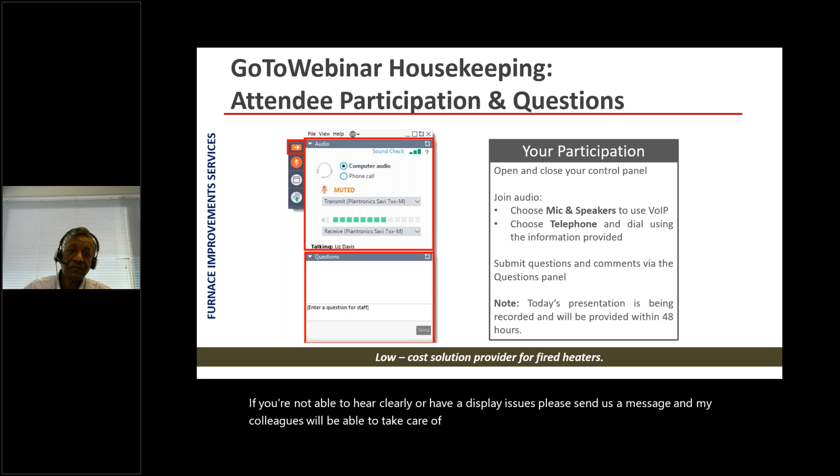I want to start with a brief introduction of our company, Furnace Improvements. We started in 1996. We will be completing 25 years in the business next year in March. We currently have 3 offices. The head office is in Sugar Land, Texas. We have an engineering office in Noida. We started it in 2005.

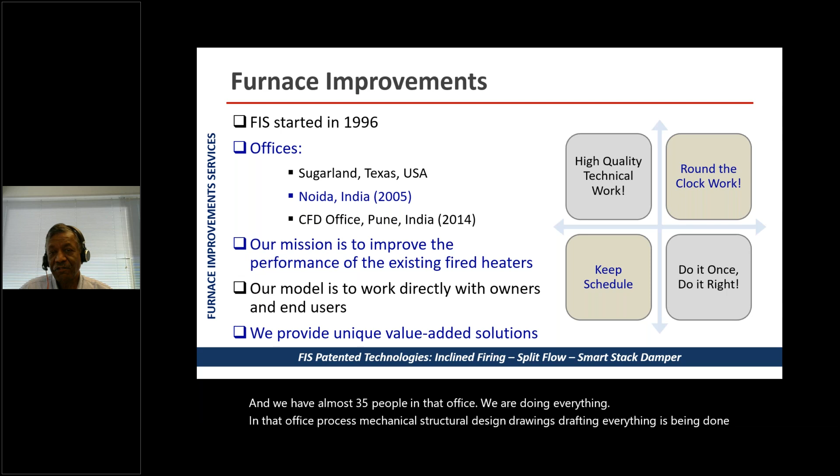And we have almost 35 people in that office. We are doing everything in that office: process, mechanical, structural, design, drawings, drafting, everything is being done there. We are a full service heater company and we can execute projects on a turnkey basis, including erection. Our CFD office is in Pune, India. It started in 2014. Our CFD team has been working exclusively on combustion, heat transfer, and fluid flow problems.

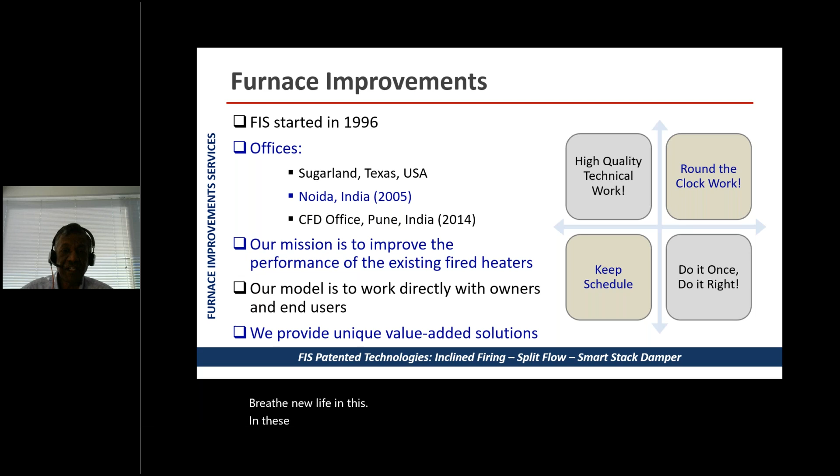Most of our business has been working on improving the performance of existing fired heaters. We try to breathe new life into these furnaces. Each coker heater is custom and unique. The problems being faced by the clients are also different in many cases. We study each heater and carry out root cause analysis in a very systematic way.

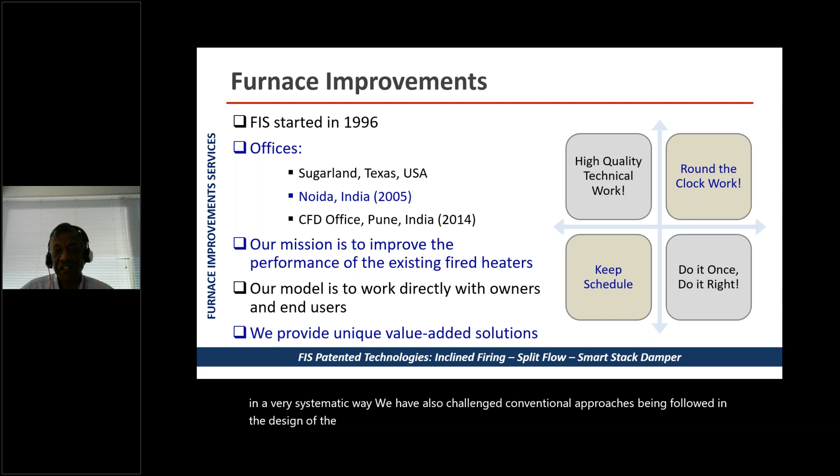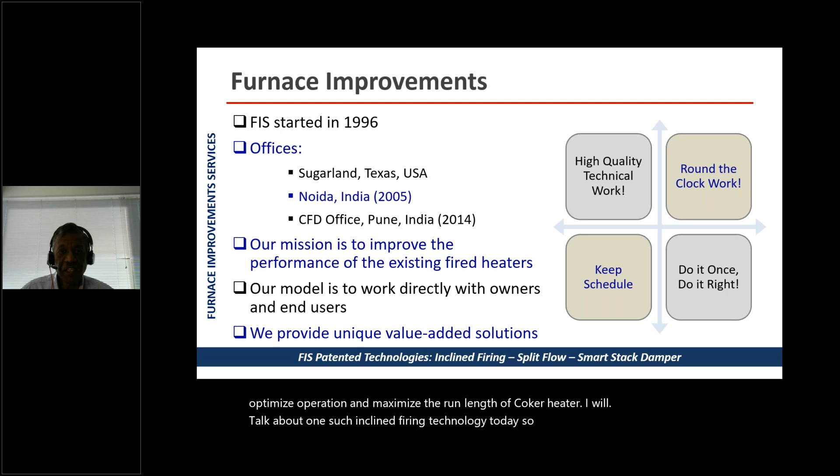We have also challenged conventional approaches being followed in the design of the heater. We have some new technologies that can help you optimize the operation and maximize the run length of coker heater. I will talk about one such inclined firing technology today. So that's basically a little bit of introduction about our company.

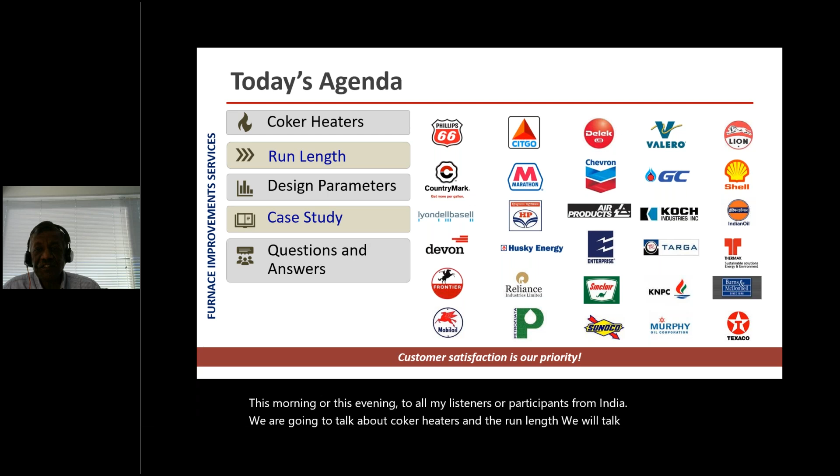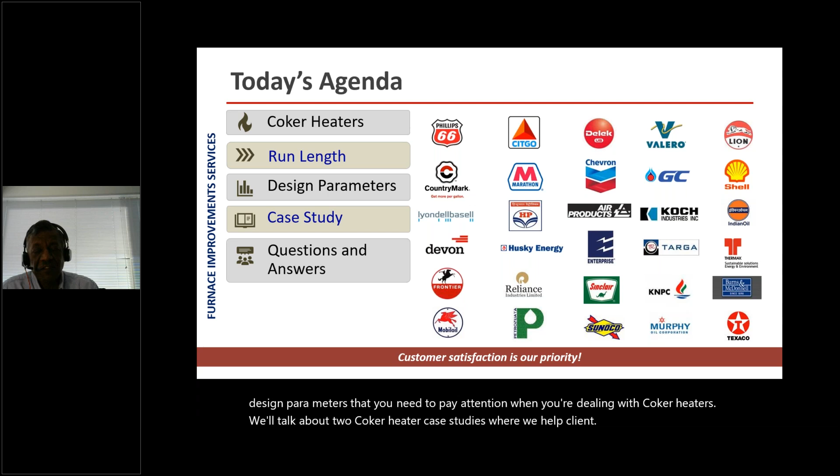This morning or this evening, to all my listeners or participants from India, we are going to talk about coker heaters and the run length. We will talk about different configurations of coker heaters, advantages, and disadvantages. Then we'll move to the critical design parameters that you need to pay attention to when you're dealing with coker heaters. We'll talk about 2 coker heater case studies where we helped clients improve the run length of their heaters. And then we will have the question and answers in the end for about 10 minutes.

So let's talk about coker heaters. And today we will be talking about the heaters which are there in the refinery. Typically, a refinery has a number of units and they convert crude to gasoline, diesel, and other useful products. The number of heaters in any refinery could be anywhere between 15 to 60. But the 4 important heaters I have listed over here are the atmospheric heater, where we heat the crude to about 700 degrees. Then comes a vacuum heater, where we heat the feed to 800 degrees and subject it to vacuum distillation.

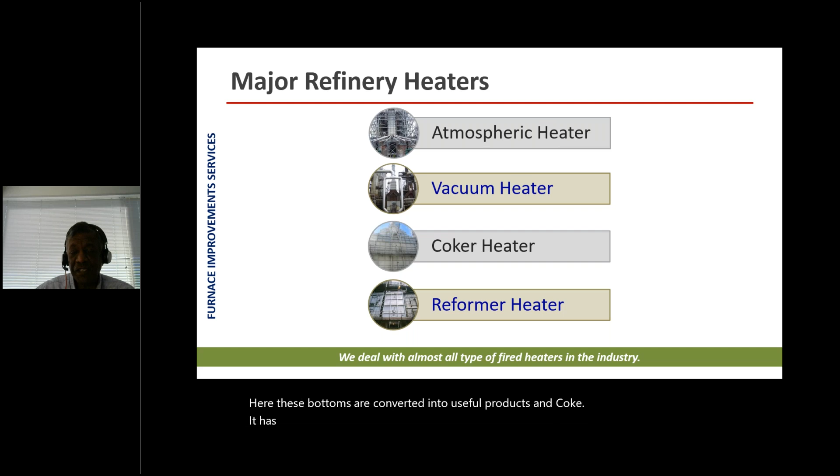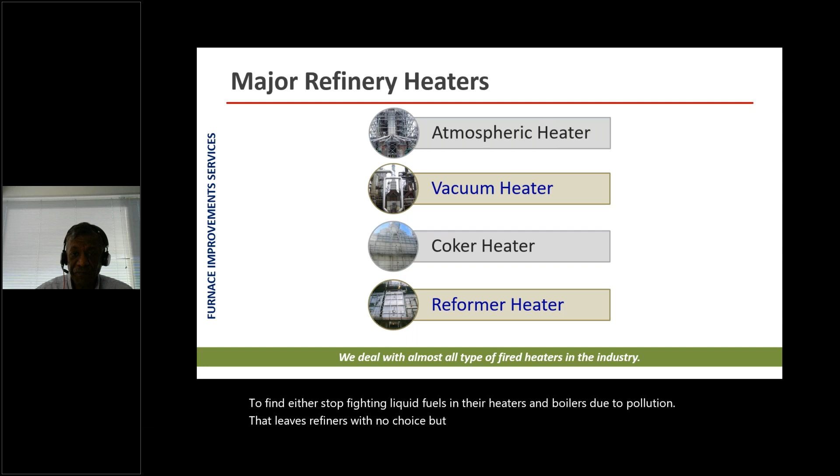And the residue from atmospheric, vacuum, and all other units is collected and sent to the coker heater. In the coker heater, the feed is heated to almost 930 degrees F or 500 degrees centigrade. Here, these bottoms are converted into useful products and coke. It has acquired extra importance in refineries all over the world as refineries have stopped firing liquid fuels in their heaters and boilers due to pollution. That leaves refiners with no choice but to install a coker unit. The coke produced is burnt in power plants and used in many other industries. So these four heaters are very critical heaters.

The last heater we want to talk about is the reformer heater, the catalytic reformer unit. And here we heat the feed to almost 1000 degrees F. But the difference is it's a very light feed. It is naphtha and recycled gas. And the heating is done in the gas phase. So it's a very different heater. But our focus today will be on the coker heater.

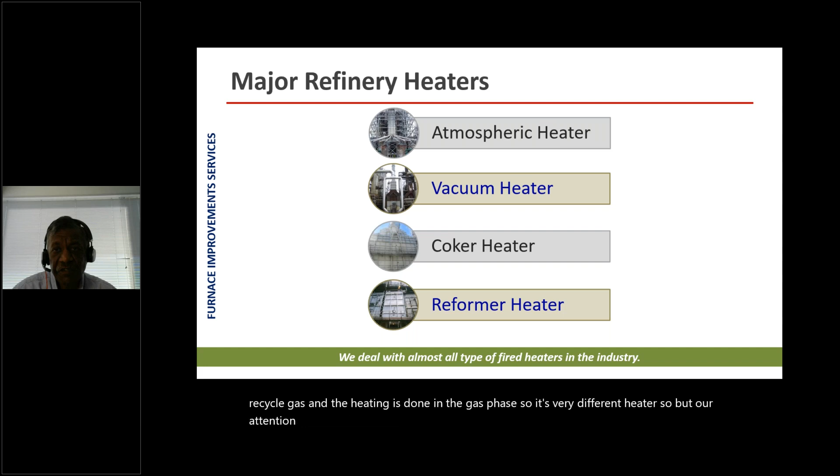So in the coking unit, our objective is to process this heavy material, vacuum residue and all other residues, into higher value products such as gasoline, diesel, LPG, and petroleum coke. So what we are going to do is to heat the charge rapidly in the furnace. And this is a very critical furnace because there is a reaction taking place. If you look at all the refinery heaters, there is a simple heating or heating with phase change taking place. Here, it's not only heating and phase change, there is a reaction taking place, and about 6% of the feed is cracking per pass. And it is an endothermic reaction, and the heater is supplying the heat.

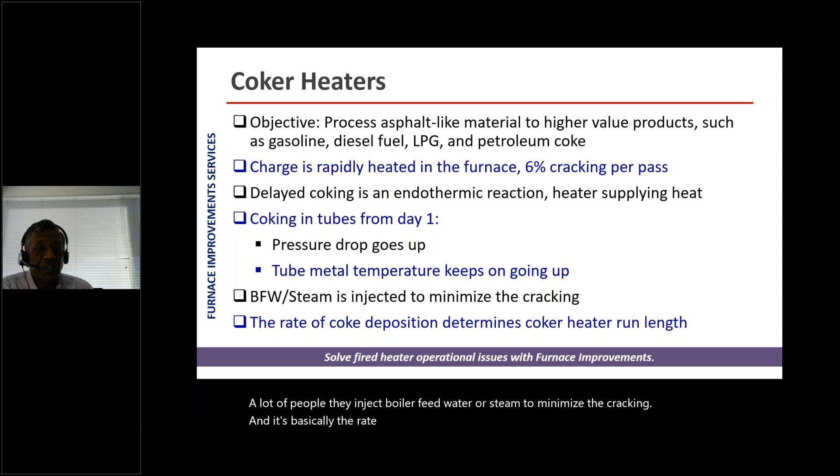So in this heater, we expect coking to start from day one because the feed is such and we are cracking, so the coke starts depositing. And two things happen. Pressure drop goes up and the tube metal temperature also starts going up because coke is an insulator of heat. A lot of people inject boiler feed water or steam to minimize the cracking. And it's basically the rate of coke deposition which determines the coker heater run length. So run length is a very, very important parameter, and we'll come to that in a few minutes.

So coker heaters, there are two types of coker heaters currently in the refinery. The single-fired coker heater has been the classic heater, and the double-fired heater is the modern heater. In a single-fired heater, as you can see from this sketch over here, there are two cells, and in each cell we have a central bridge wall, with tubes on the wall and burners in the center firing along or at the bridge wall.

The function of the bridge wall is to divide the radiant cell into independently controlled cells so that you can monitor and control the outlet temperature of each pass. So that is the construction of the classic heater, or the single-fired heater. We do put the last 5 tubes, if you see over here, at 3D pitch. The last 5 tubes have typically been put at 3D pitch, and that is done to minimize the radiant heat flux in the hottest section.

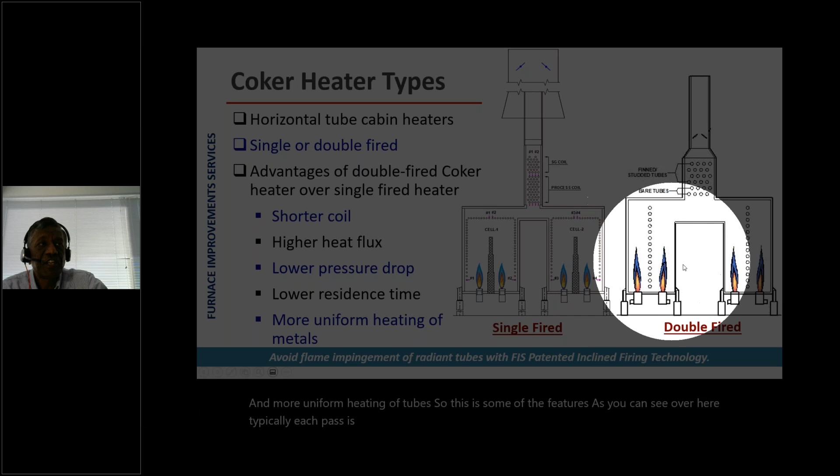As a result, I have two choices. I can keep the same velocity and have lower pressure drop, or I can increase the velocity, the fluid mass velocity, and maintain the same pressure drop. It does offer lower residence time, lower coking, and more uniform heating of tubes. So these are some of the features. As you can see over here, typically each pass is almost like a cell. So one pass is like a cell. And here also the last 5 tubes are put at 3D pitch, and the convection section is on the top in the center.

There is one extra feature which has been incorporated in double-fired heaters, and that is because each pass has its own radiant cell or radiant section, the designers are able to offer online spalling. In online spalling, what you do is you cut off your feed and inject steam. And when you inject steam, it breaks the carbon coke from the tubes and removes the coke. And we can do that. Once we do that, it will lower the tube metal temperature.

So let's say it is a 2-pass heater or 4-pass heater. We go on a reduced load, inject steam in one pass, clean it up partially, and then go to the second pass. And if there is a third pass or fourth pass, we do that. So that is one advantage in double-fired heaters, and refiners make use of this facility to spall their heaters, reducing the tube metal temperature by about 100 degrees each time. But after 2 or 3 spalls, they again have to clean their fired heaters or coker heaters using pigging.

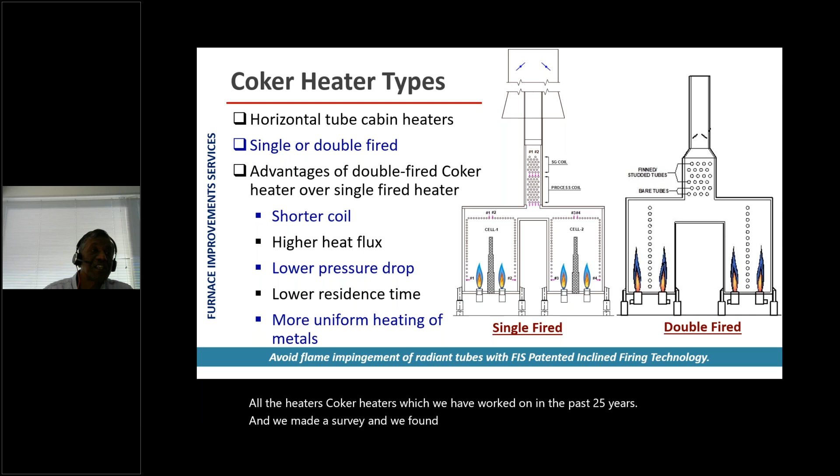So the question comes over here: if this heater is so good, what went wrong? Because in the last 5 years, there were 3 or 4 clients who have modern double-fired coker heaters, and they were experiencing only 3 to 4 months run length. So we started studying all the coker heaters which we have worked on in the past 25 years. And we made a survey and we found several deficiencies in the double-fired coker heater design.

And these things happen when everybody starts building coker heaters. All heater companies can offer coker heaters now. And when all companies can offer coker heaters, it becomes competitive. And once it becomes competitive, vendors start cutting corners and start trying to make heaters more and more compact. And once they do that, you have short run lengths. So if you cut corners, you will get nothing but short run lengths. But that's what we want to talk about today: how can we improve the run length. But the reason I'm saying this is that it has been a problem.

We thought double fired heaters would be able to offer 1 year run length or even more, but I think the heaters which we are seeing in the industry are not able to do that. There are a couple of things. In coker heaters, tubes generally last for about 8 to 10 years. So every 10 years, you can upgrade your coker heater while retubing the radiant section or retubing the convection section. So you do get a chance to make it right, or at least partially right.

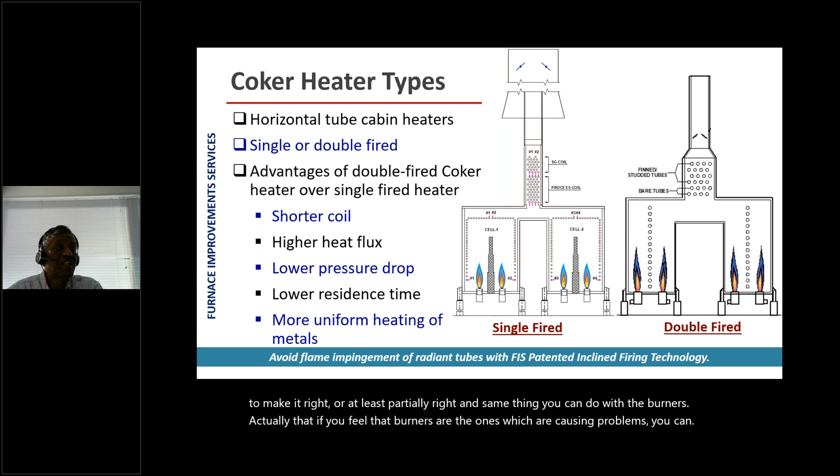And the same thing you can do with the burners actually. If you feel that burners are the ones which are causing problems, you can upgrade them or change them. It is not very expensive. So let us see how coker heaters are designed.

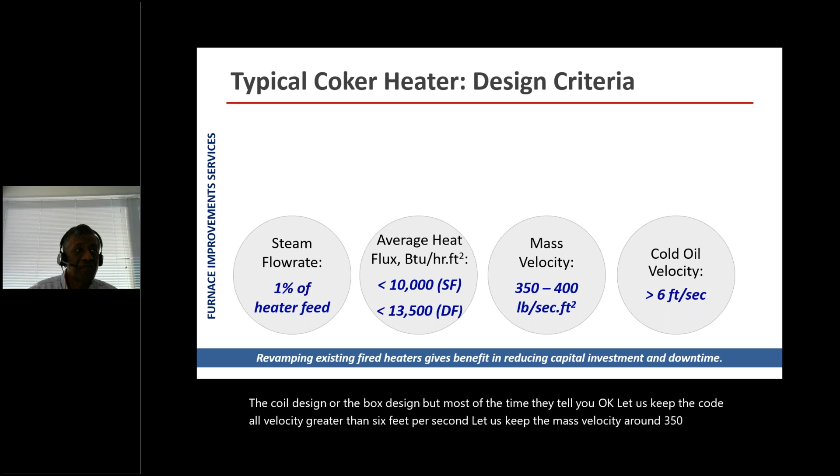Generally, the designers or the licensors will give you a few guidelines. And sometimes they give you the coil design or the box design, but most of the time they tell you, okay, let us keep the cold oil velocity greater than 6 feet per second. Let us keep the mass velocity around 350 to 400. Keep the flux less than 10,000 for single fired or 13,500 for double fired. And inject boiler feed water or steam, which could be around 1% of the heater feed. So these are some of the rough guidelines given by the licensors, or the people who are building coker units. That's typically what we get.

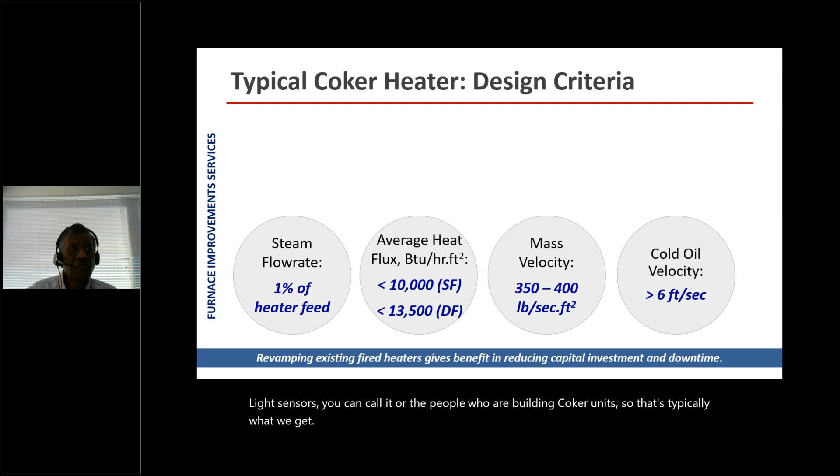So we did a database of almost 38 coker heaters we had worked on or studied at different times. And most of the coker heaters are multiple radiant cell horizontal tube box heaters. The flow is from top to bottom. Average inlet temperature is around 600 degrees, outlet is around 930. Inlet pressure about 361, outlet around 70 psig. So about 290 is the average pressure drop across this heater. Average mass velocity is around 400 pounds per second per square foot.

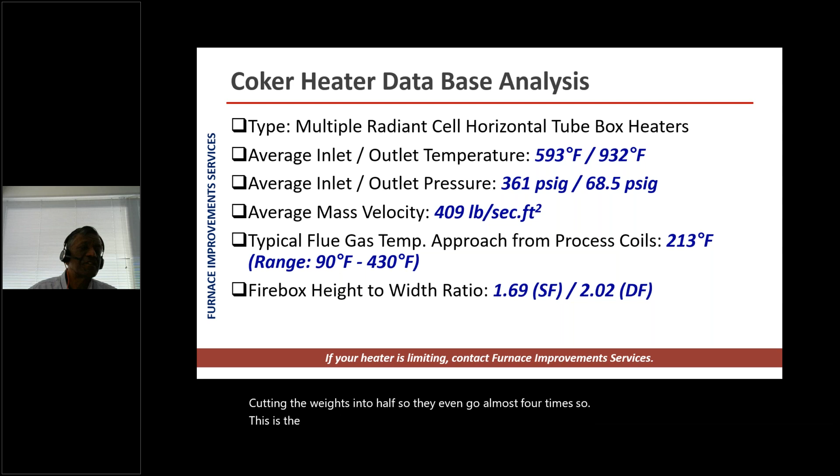Typical flue gas temperature approach from the process coil is around 200 degrees. I will tell you a little later the importance of this approach, but to me, it appears very high. And another thing which we noticed was the firebox height to width ratio. Surprisingly, single fired had a lower height to width ratio of 1.5 or 1.75, and the double fired were offering 2.02. And some of these heaters even have a height to width ratio of 4, because if you put 2 rows of tubes in one firebox, you're basically cutting the width in half. So they go almost 4 times. So this is the typical analysis of coker heaters we want to talk about.

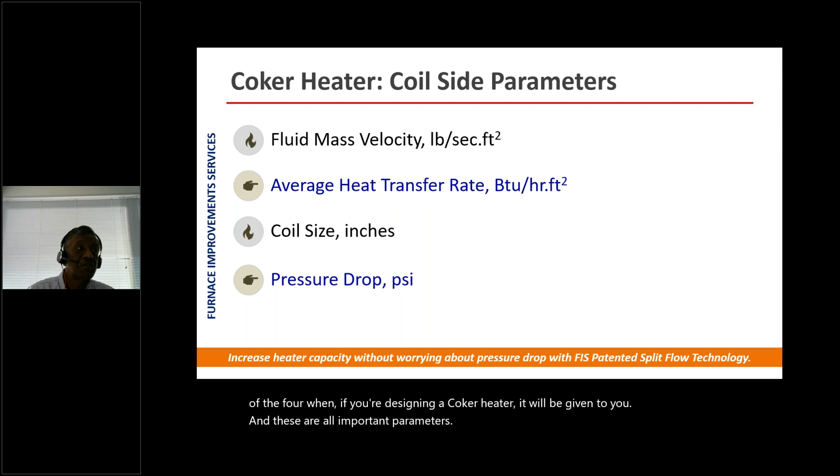What are the different parameters when we design these things? As I said, fluid mass velocity figures into the coil side parameters, along with average heat transfer rate, coil size, and pressure drop. These are some of the four that, if you're designing a coker heater, will be given to you. And these are all important parameters. Let us start looking at these.

Fluid mass velocity is a very important parameter. It is mass flow divided by the flow area of the coils. The units are pounds per second per square foot. As we said, the average is 409. Now, one thing you have to realize is pressure drop is proportional to the square of mass velocity. So if you increase the mass velocity, the pressure drop will go up.

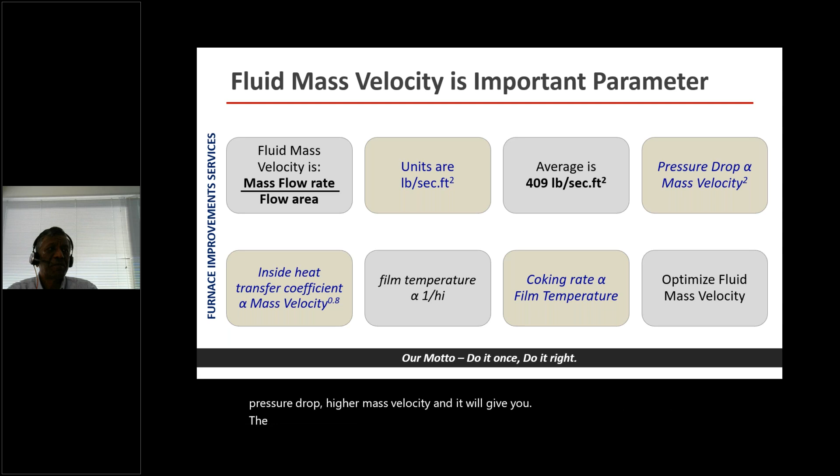Another thing you also have to see is the inside heat transfer coefficient. The inside heat transfer coefficient is important because it controls the film temperature, and film temperature controls the coking. The inside heat transfer coefficient is proportional to the mass velocity raised to the power 0.8. So you can go for a higher pressure drop, higher mass velocity, and it will give you a lower film temperature and higher run length, optimizing your run length.

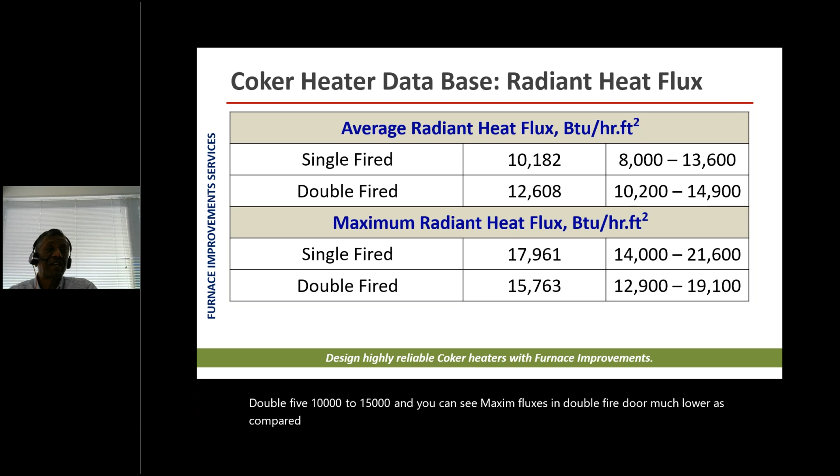So the third thing, before I go to the coking rates, I want to talk about the tube size. Typically in coker heaters, the smaller the tube size, the better off you will be, although you don't want to go lower than 3-inch, because if you have to clean it or remove coke, you will have trouble. So 3 inches is typically the lowest size, but 3.5 or 4 inches are typically the sizes used in coker heater designs, and they offer the best surface to volume ratio.

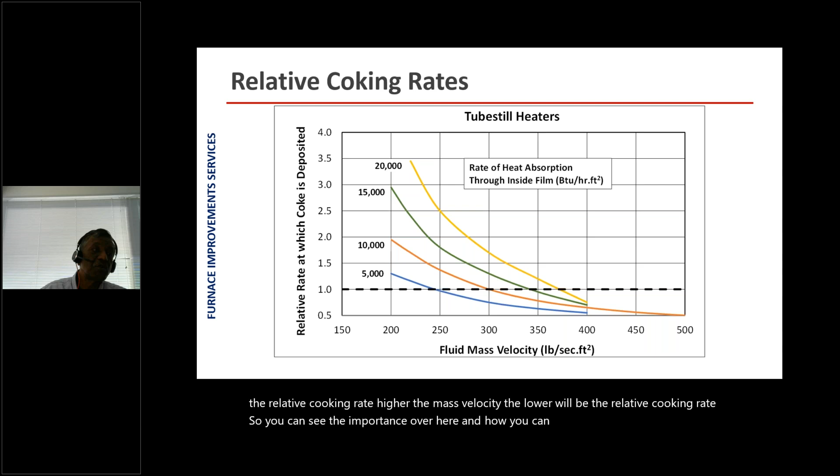Lower the flux, the lower will be the relative coking rate. Higher the mass velocity, the lower will be the relative coking rate. So you can see the importance over here, and how you can optimize your coker heater design or coker heater operation by trying to see if you can optimize or maximize the fluid mass velocity.

So let's talk about the fireside parameters. Fireside parameters are heat release per burner, burner to tube distance, burner to burner distance, and burner air side pressure drop. These are very important parameters. They determine how long your flame is going to be, how high your flame is going to be, how is the heat distribution in the furnace, and how uniform it will be.

The reason I'm talking about these parameters is that they do not affect the design of the coker heater. When you're designing the coker heater, or any heater, these parameters do not play any part in the design, and it is left to the designer's experience to take care of these. And this is where most of the coker heaters fail, actually. And I will show you how people work and do it.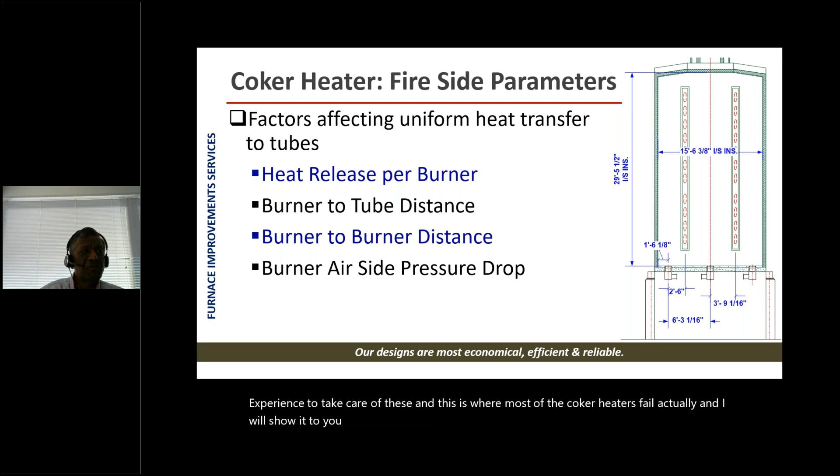I think all of you know, fired heaters are designed using correlations developed by Lobo and Evans back in the 1940s. And they assumed that there is going to be uniform heat transfer in the firebox, or a continuously stirred tank reactor model. That is a basic assumption. Now, we have been using these formulas for more than 80 years now, but we also know that these are not true,

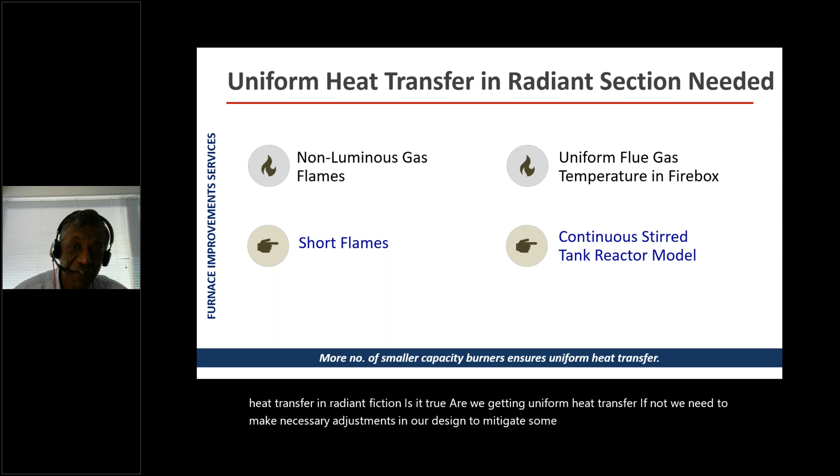because today we have the power of CFD modeling, and we can check the radiant section, the burners, the flue gas temperature profiles, the flame length, the heat transfer to the tubes and the location of hotspots. So what I feel is it is important to do CFD modeling and make sure that, when we designed the heater, we assumed uniform heat transfer in the radiant section. Is it true? Are we getting uniform heat transfer? If not, we need to make necessary adjustments in our design to mitigate some of these factors, and you can do that because we have CFD available, and we can ensure that by CFD, we take care of most of these parameters.

We also did a survey on the burners. A typical coker heater had about 64 burners. The range was from 3 to 144. Design heat release per burner was about 3 million BTU average. Burner to tube spacing was about 4 feet or even less, 3.7 on average. The lowest was 2.5 and the highest 6.8. And then comes the burner to burner spacing for uniform heat transfer. We found it was 5 feet, an average of 4.7 feet.

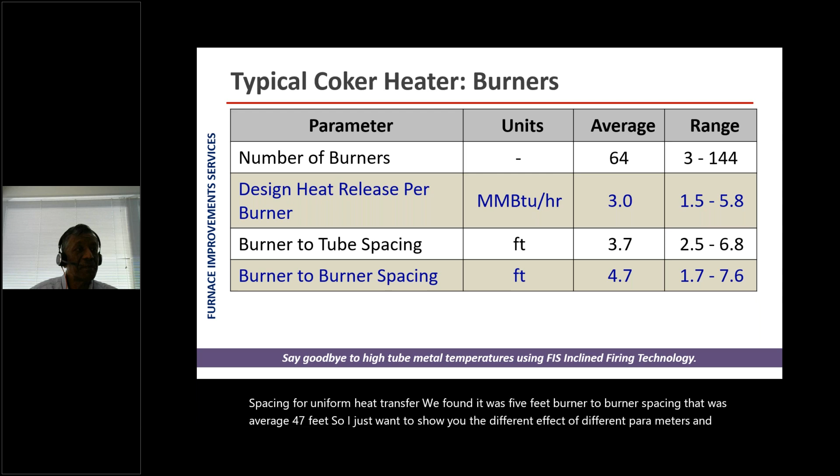So I just want to show you the effect of different parameters and how they play a part in your fired heater run length. This is a plan view of a double fired coker heater. If you look at the overall picture, everything looks all right. The burners are there. There are 3 rows of burners. The center burners are, I think, almost every 4 feet. There are 2 rows of burners on either side, and there are 2 rows of tubes.

But this coker heater is having a lot of issues. This heater is having a run length of only about 3 to 4 months. So some of these parameters may be more important. One of the parameters which I find important is the burner to tube clearance. The reason I say this is that ultra low NOx burners have very long flame lengths. And when they have long flame lengths, the flames can lean actually. Flame is nothing but a gas jet, and it can always lean. These burner flames get affected even by wind velocities.

So some of these things could make a great impact. And flames are very, very high temperature gas jets. Typical flame temperature could be anywhere between 2500 to 3000 degrees. So you can see how the burner layout or the heater layout can affect the run length and other parameters.

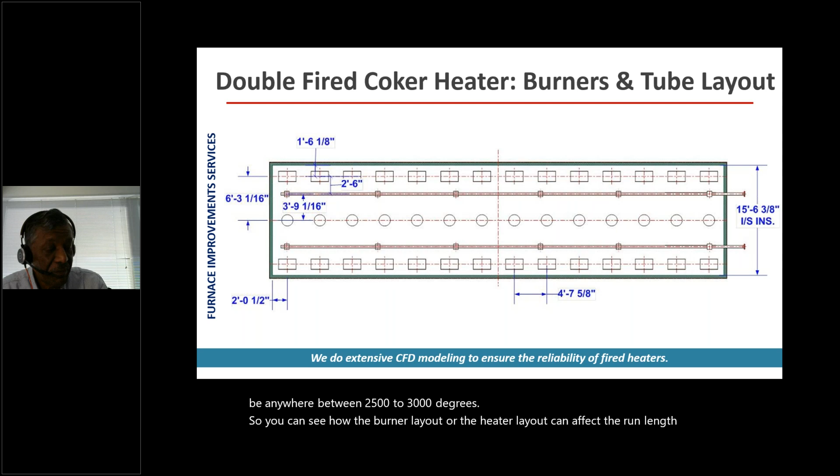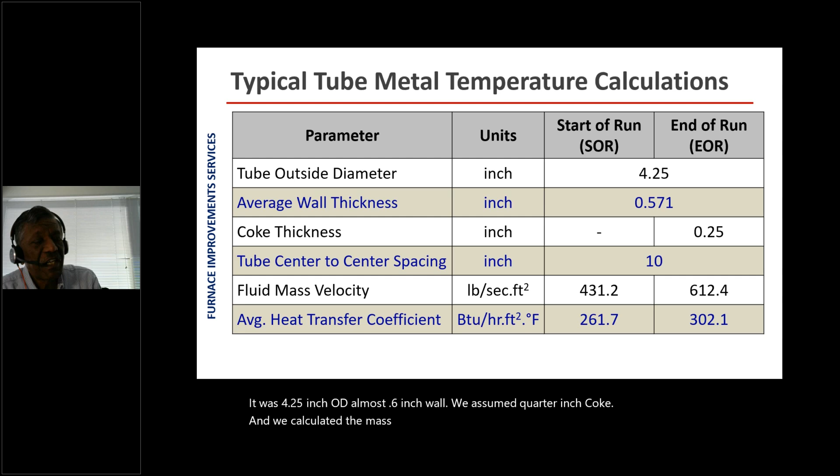I want to tell you a little bit about the tube metal temperature calculations. We do tube metal temperature calculations at the start of run and at the end of run. This is for one heater, which is a single fired heater. And it was 4.25 inch OD, almost 0.6 inch wall. We assumed quarter-inch coke. And we calculated the mass velocity, we calculated the heat transfer coefficient, and then we calculated the maximum flux and the maximum tube metal temperature, assuming a fluid temperature of 950. It starts with about 1082 at the start of run with no fouling and almost 1255. Maybe that is the limit of even the coil metallurgy actually.

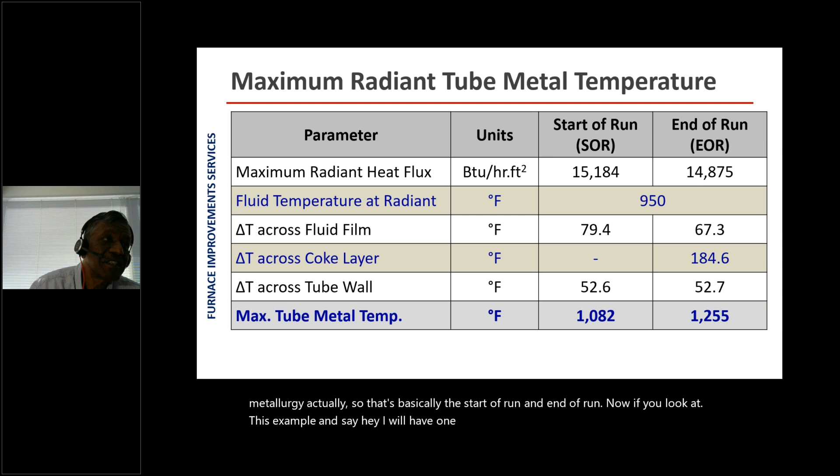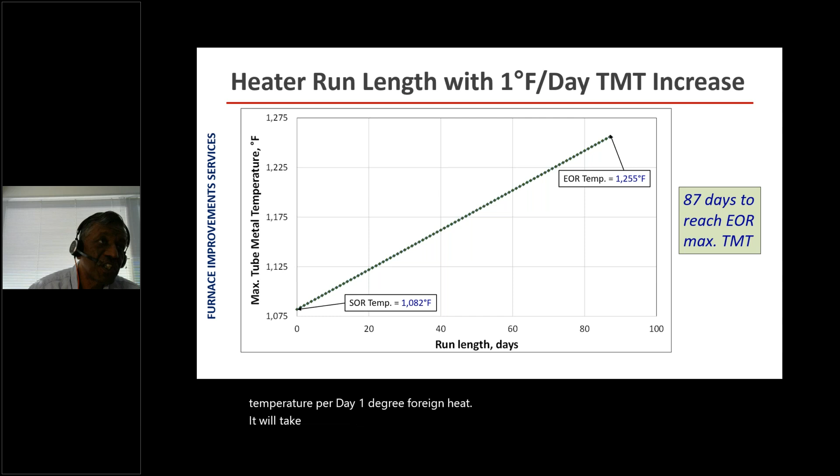So that's basically the start of run and end of run. Now, if you look at this example and say, hey, I will have 1 degree temperature increase per day, how will that affect? So we plotted this, and if you use 1 degree Fahrenheit temperature rise in tube metal temperature per day, it will take you 87 days to reach EOR or maximum TMT of 1255. So you can see it is not good enough. You don't want 3 months run length of your heater. We are looking at

lower temperature rise. If you want 1 year run length, then typically say about half a degree is what you would like to get control. That's how you should control your run length, about half a degree. And that is valid for P9 material where the limiting design temperature is 1300. Please make sure your tubes are designed for 1300 because it requires higher thickness. The other option, and a lot of refiners have opted for this change, is to upgrade the metallurgy to stainless steel 347. And that gives us about 1500 degrees temperature limit. And there, if you see, we can afford to have a 1 degree temperature rise per day.

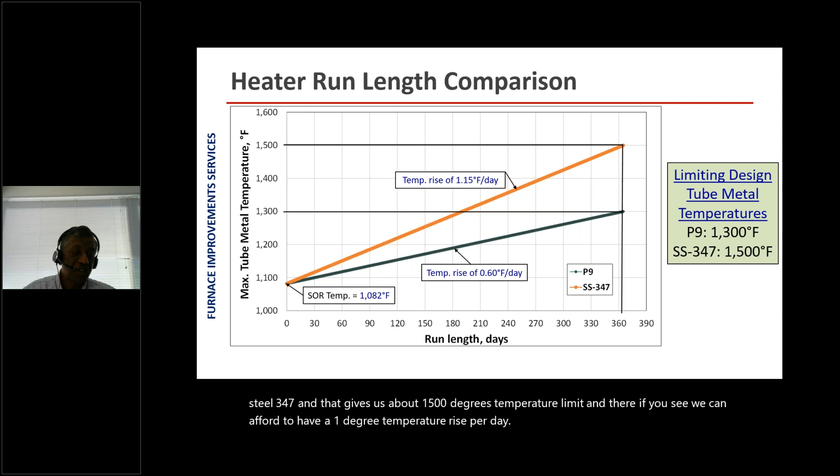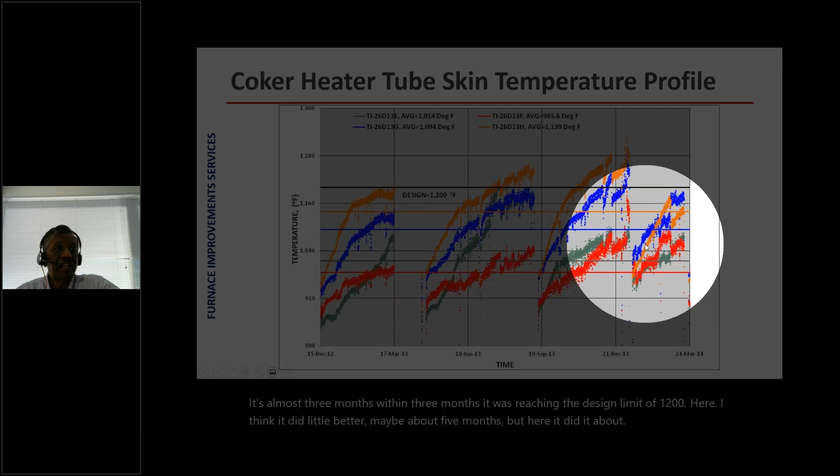So I want to show you the coker heater tube skin temperature profile. This is from that same heater where I showed you the burners and tube layout, the plan view. And if you see over here, it's almost 3 months. Within 3 months, it was reaching the design limit of 1200. Here, I think it did a little better, maybe about 5 months, but here it did about 3 months again, and here it did even less than 3 months. So if you see the temperature rise, they had to clean almost every 3 or 4 months, which is not acceptable. That requires a lot of effort.

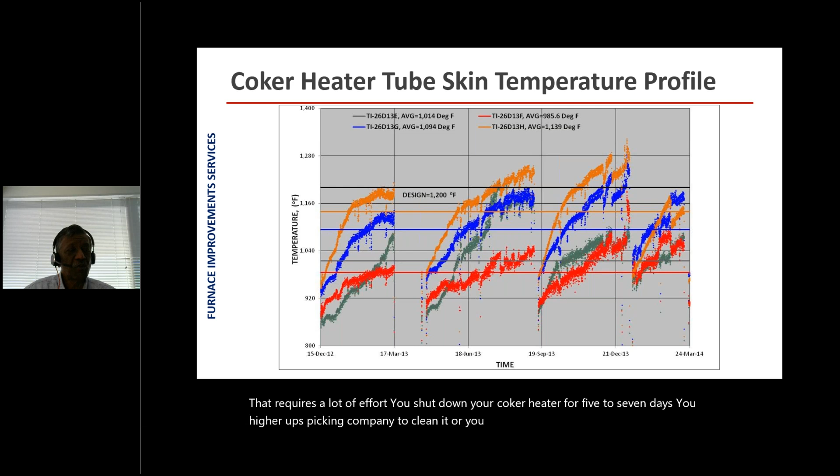You shut down your coker heater for 5 to 7 days. You hire a pigging company to clean it, or you do steam air decoking. So a lot of problems. So the best thing is to minimize coking. So I want to present to you two studies, and this is a double fired coker heater, and the client was experiencing high tube metal temperatures in the lower tubes.

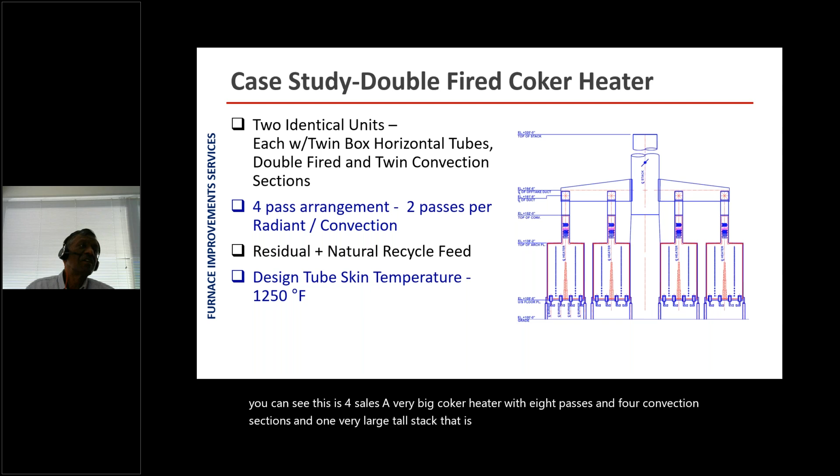So this is, as you can see, 4 cells, a very big coker heater with 8 passes and 4 convection sections and one very large tall stack. That is the configuration. So if you look at the configuration in detail, it was 4 burners. If you see over here, 4 rows of burners, 2 rows of tubes, a central bridge wall in the center. So that was the construction. This heater had 4-inch tubes in the top, 30 tubes, and bottom tubes were 5-inch NPS schedule 160. And this was having a lot of problems actually.

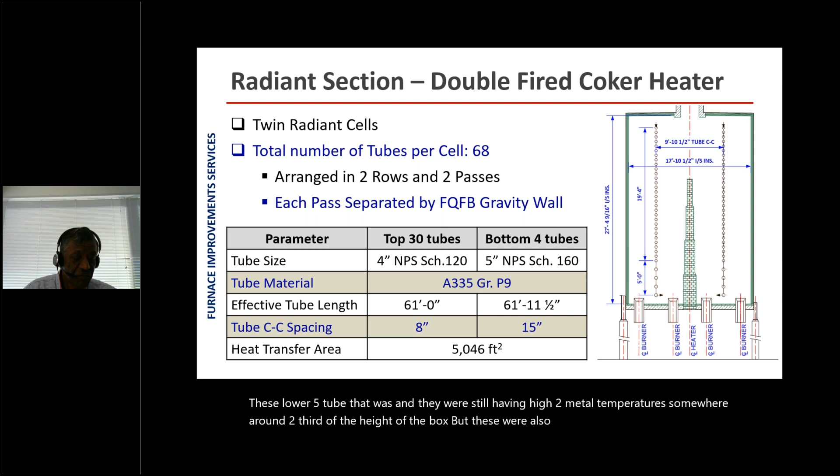And then the client told us they were having maximum coking in these lower 4 tubes. And they were still having high tube metal temperatures somewhere around 2/3 of the height of the box. But these were also coking up very fast actually. So we studied it, and we came up with several different revamp options. We said, okay, let us take your four radiant tubes which are at the outlet and change them with 6 4-inch NPS schedule 120 tubes. Now, client wanted to upgrade the radiant and convection coil metallurgy to 347H.

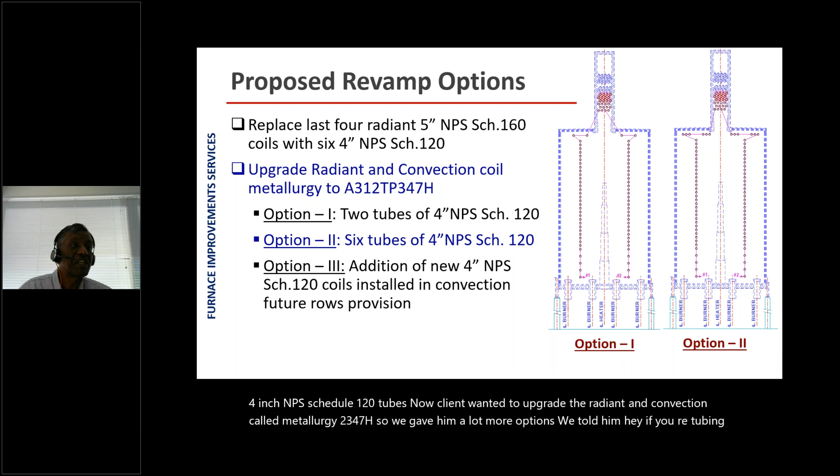So we gave him a lot more options. We told him, hey, if you are retubing it, we would like to see some modifications. And we gave them a modification in option 1 of putting 2 extra tubes on the arch, per pass.

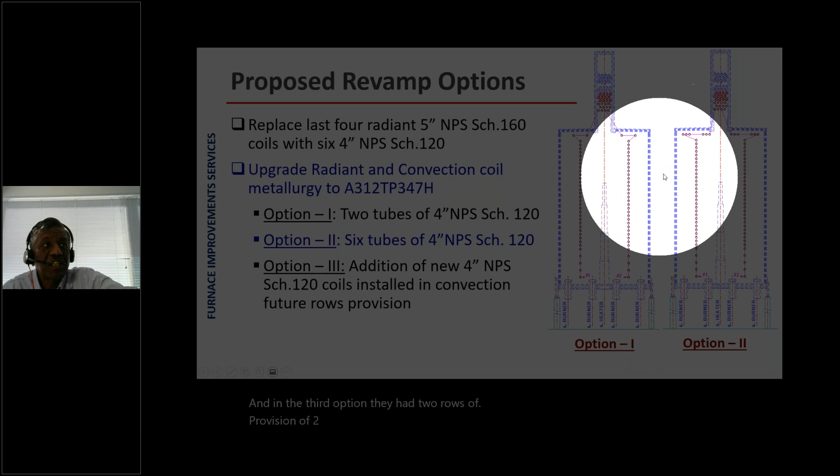In the second option, we gave him 6 tubes at the arch. And in the third option, they had 2 rows of provision of 2 future rows in the convection section. And we said, hey, let's do this as well as add 2 more rows in the convection section. So basically, we gave him 3 upgrade options.

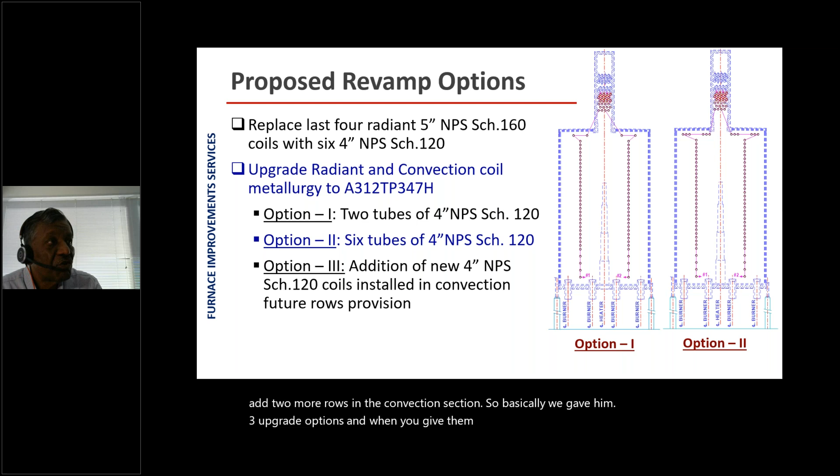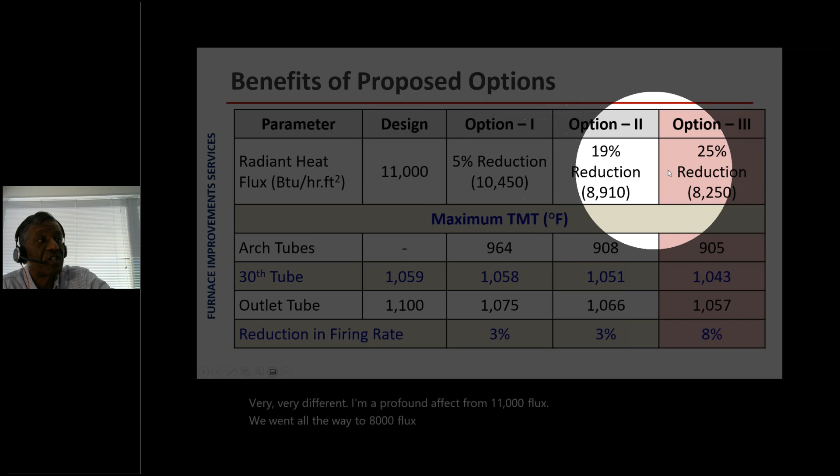And when you give them these options, you see the effect is very, very different, a profound effect. From 11,000 flux, we went all the way to 8,000 flux, 25% reduction in flux. We reduced the tube metal temperature from 1100 to 1057. And we also reduced the firing from whatever they were firing by about 8%, which is very, very profound.

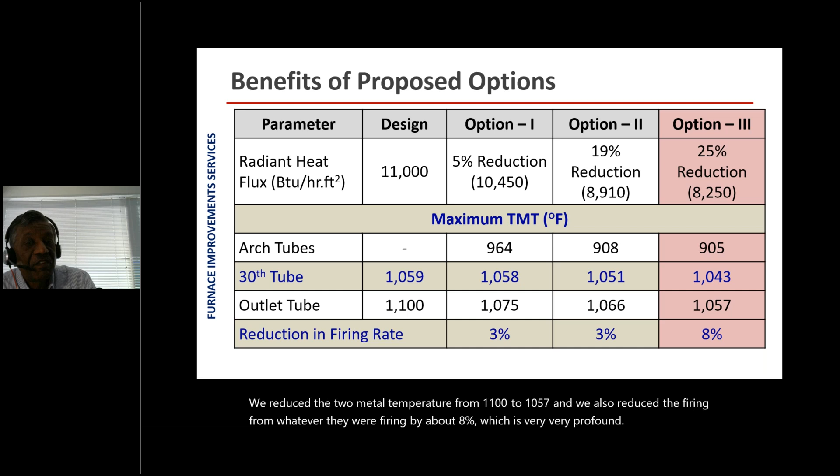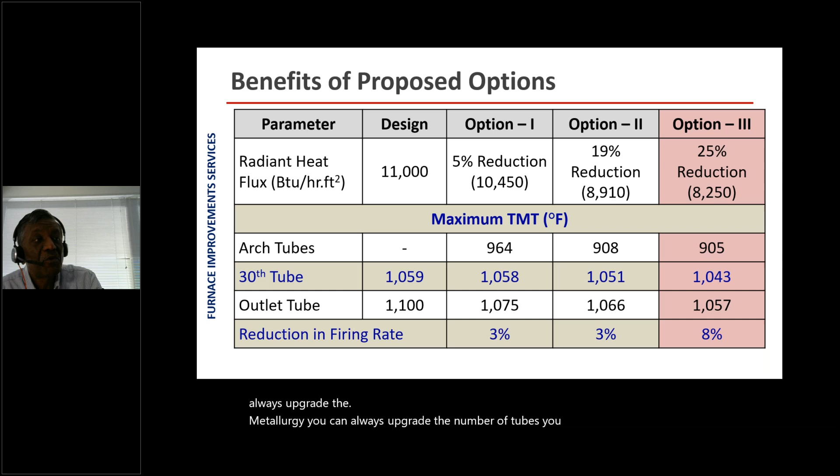So keep an open mind whenever you are retubing your coker heaters and look at different options. It is not necessary that whatever the heater vendor gave you 20 years ago is the optimum configuration. You can always upgrade, just like a computer. You can always upgrade the memory, you can always upgrade the hard drive. Similarly, you can always upgrade the metallurgy, you can always upgrade the number of tubes, you can always add more tubes. And those incremental costs are very, very low, especially when you're spending millions of dollars in retubing.

We had a similar recommendation on their existing burner layout. They had 14 burners per row, total of 56 burners in each cell. And these were ultra low NOx fuel gas fired burners. And we said, okay, let us do the CFD modeling and see what we find out.

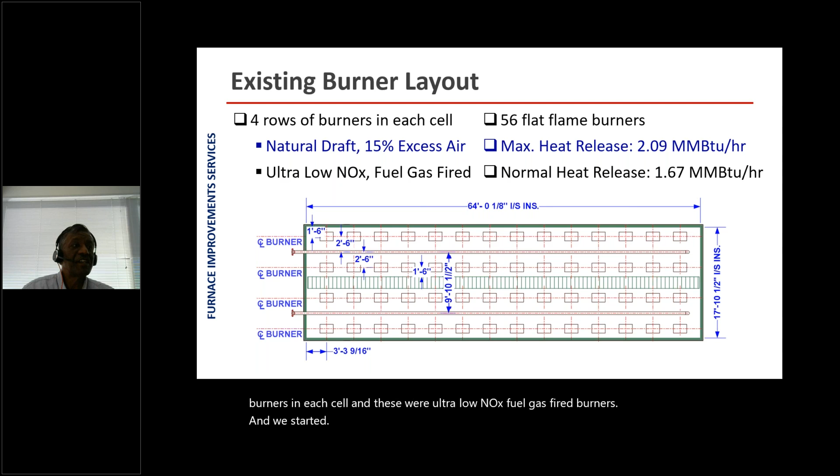We did the CFD modeling of these burners, and we found out that the flames were almost touching the tubes. I mean, if you look at D1, D2, D3, they are less than a foot. In fact, 6 inches. And this is at ideal conditions. And if you have wind blowing, if you have anything else going on, higher excess O2 or lower excess O2, the flames could touch. And that's where they were having hotspots.

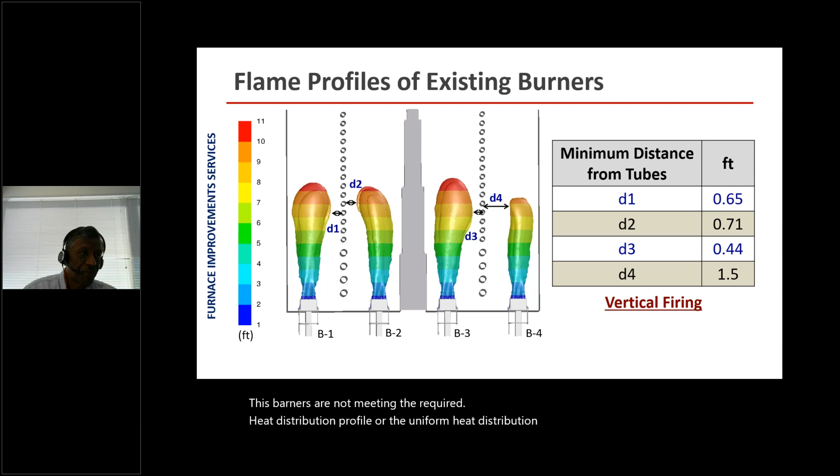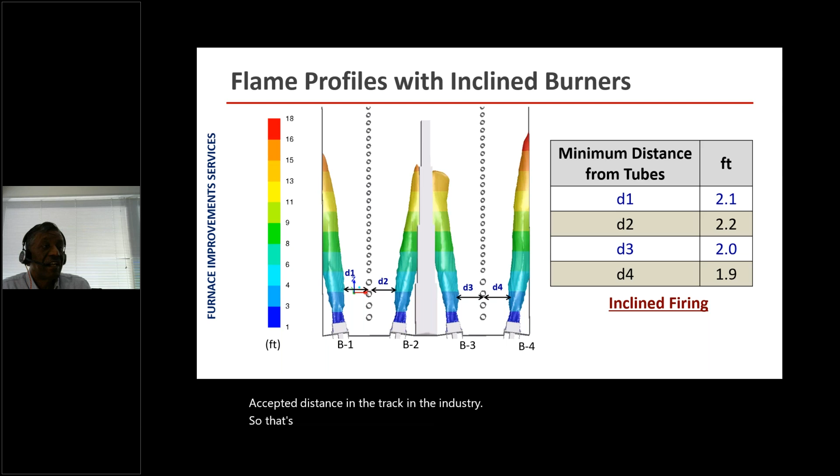So we came up with the conclusion that these burners are not meeting the required uniform heat distribution profile. So without asking them to spend too much money, we said, okay, let's take your existing burners and put them at about a 7-degree angle. So we took the existing burners and then moved them outwards by about 7 degrees. And when we do that, we are able to increase the minimum distance from the flame to the tubes to more than 2 feet. And typically 2 feet is the minimum accepted distance in the industry. So that's basically what we did, and it makes a lot of difference.

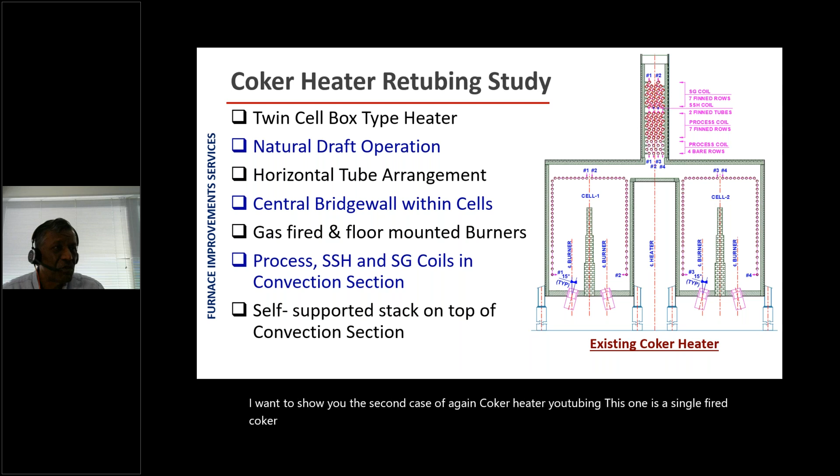I want to show you the second case of, again, coker heater retubing. This one is a single fired coker heater and a conventional coker heater with twin cells. There were 2 such heaters, so basically 4 cells again, and each cell was having 2 passes, common convection section, very central bridge wall with burners inclined at 15 degrees. Again, this company was facing a lot of problems. They were decoking every 6-7 months. The tube life was very low, almost about 5 years.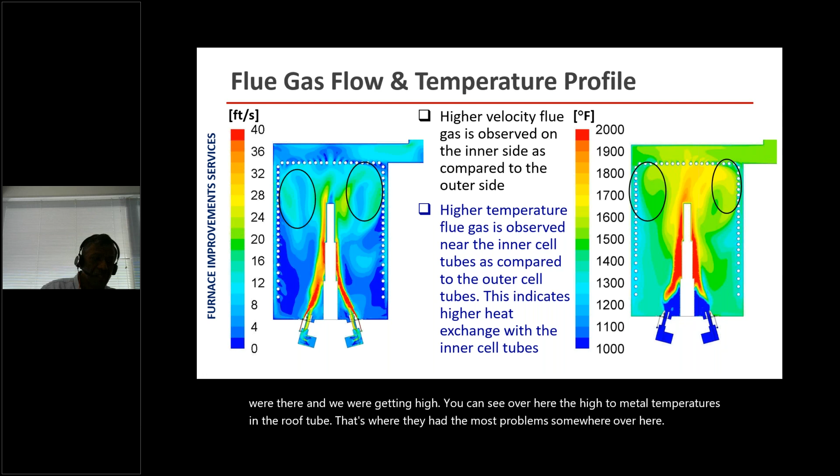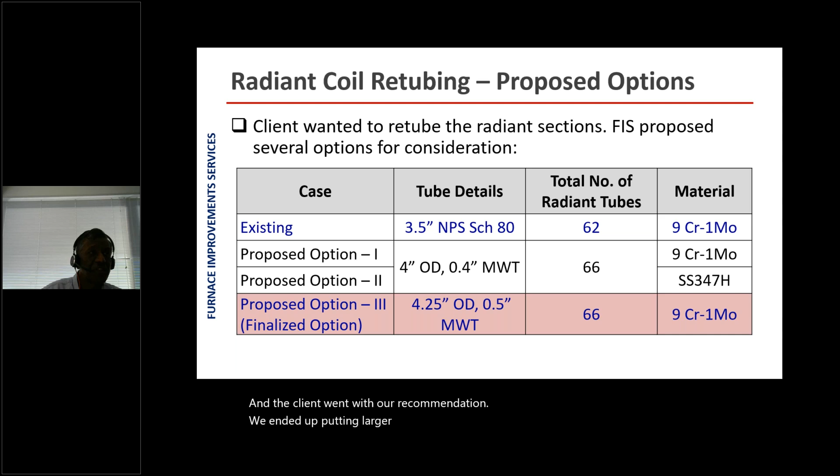So the client said, hey, I want to go for retubing. And we said again, okay, if you're going for retubing, let us do something else. Let us give you some upgrade options. So we said we can put more tubes, we can put higher diameter tubes. And the client went with our recommendation. We ended up putting larger diameter 66 tubes. And this is the before and after scenario. We moved the tubes up by about 2 feet and also installed a baffle to make sure they are protected from high flue gases.

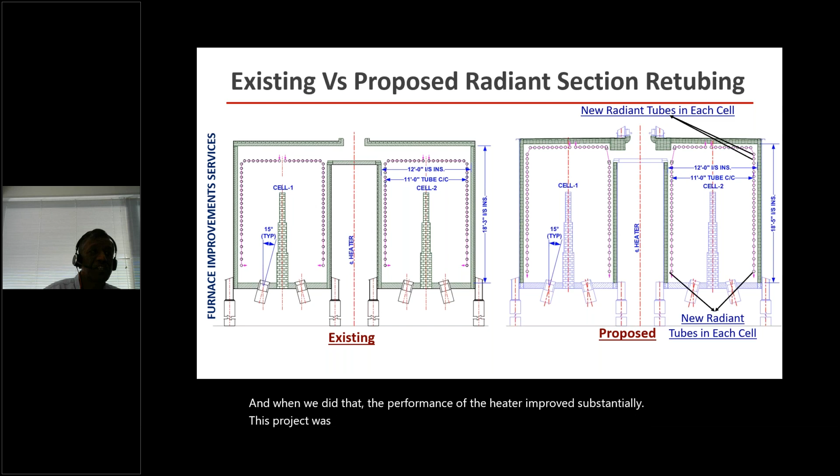And when we did that, the performance of the heater improved substantially. This project was done about 3 years ago now. And you can see over here, we were able to reduce the flux. We were able to reduce the firing bridge wall temperature, and even the fluid mass velocity we were able to improve.

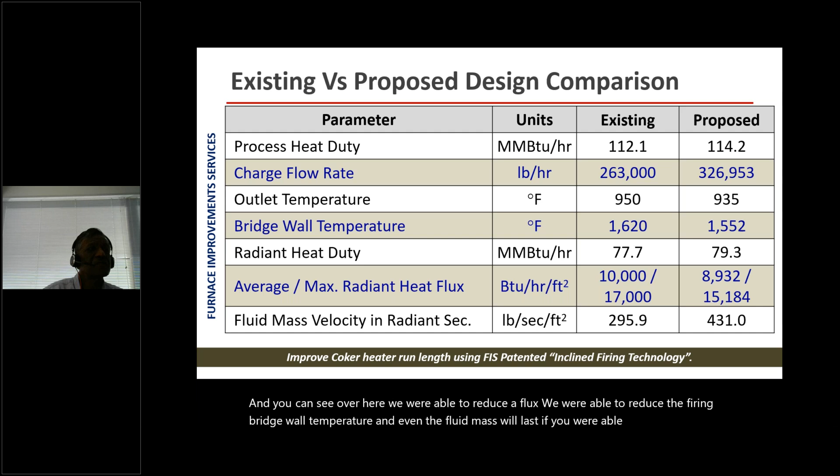I would want to tell you: do not overlook your convection sections. Convection sections are very important, even though we focus most of the time our attention on radiant sections. Convection sections can help you a lot because it's easier to change them. It's very inexpensive because they are shop fabricated. We take out the old one and put a new one,

and we can redesign the convection to maximize the process heat recovery. In this one, you can see we had 4 tubes per row. We redesigned it with the same width to 6 tubes per row using smaller tubes, and we were able to reduce the flue gas approach from almost 200 degrees to about 40 degrees. So that gives us another 5% improvement in the firing rate or in the efficiency. So any reduction in the firing rate counts a lot.

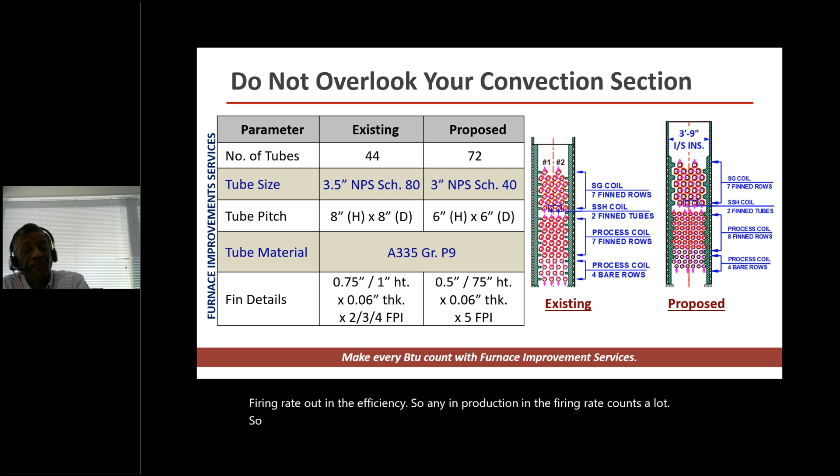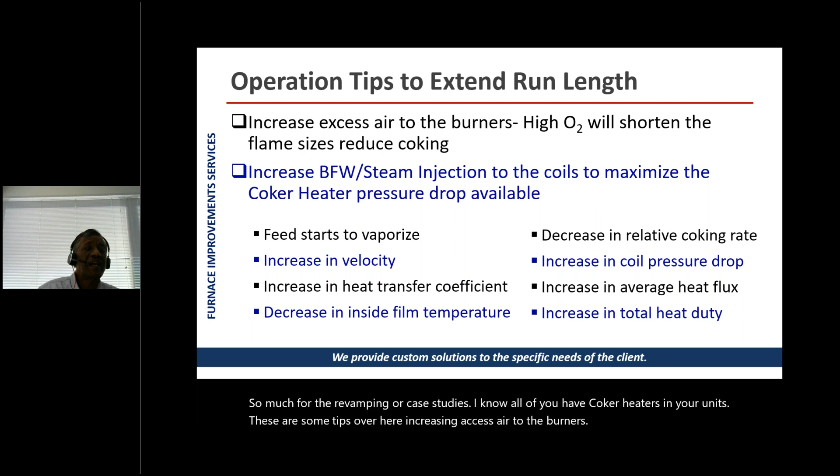So, so much for the revamping or case studies. I know all of you have coker heaters in your units. These are some tips over here: increasing excess air to the burners and increasing boiler feed water steam injection to the coils to maximize coker heater pressure drop available, especially if you're running your heaters on lower charge rate. So steam injection will definitely help you.

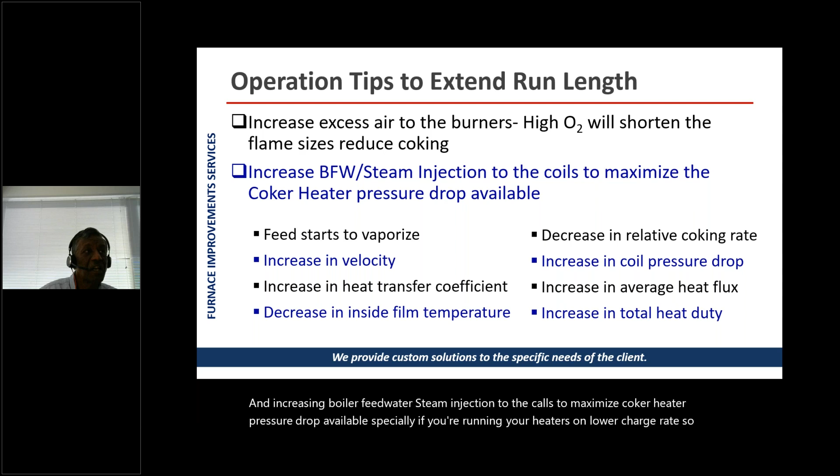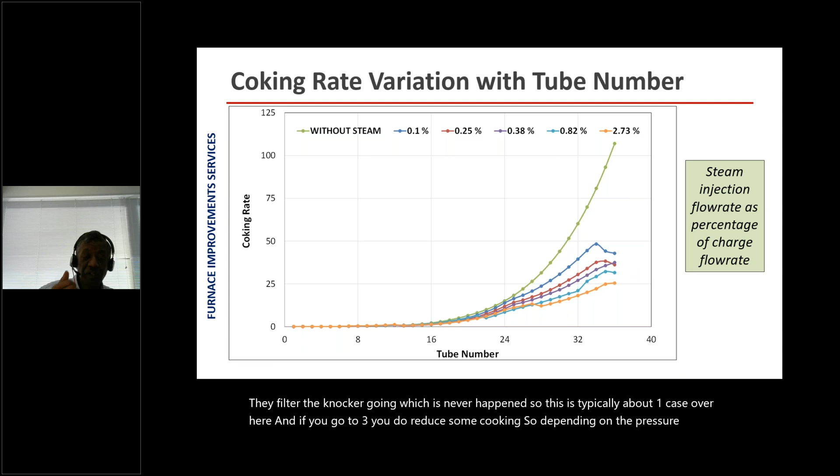This is a coking rate profile with no steam, which has never happened. So this is typically about the 1% case over here. And if you go to 3%, you do reduce some coking. So depending on the pressure drop available with you, you can go for maximizing the steam injection. It helps. It will help you, depending on how much pressure drop you have.

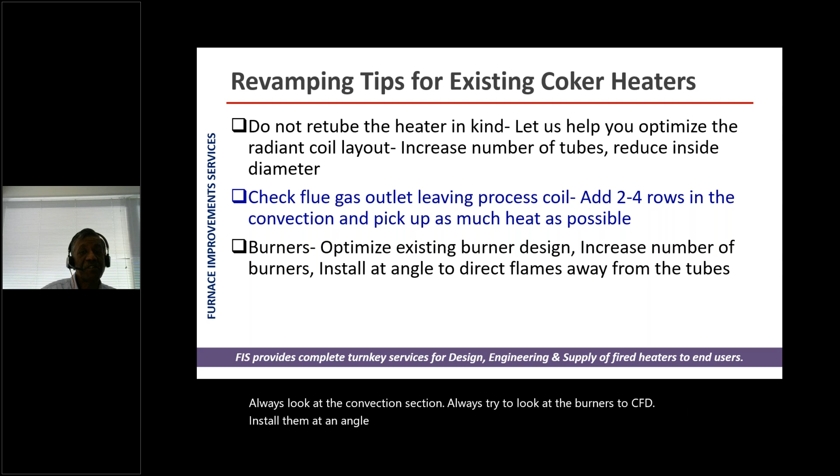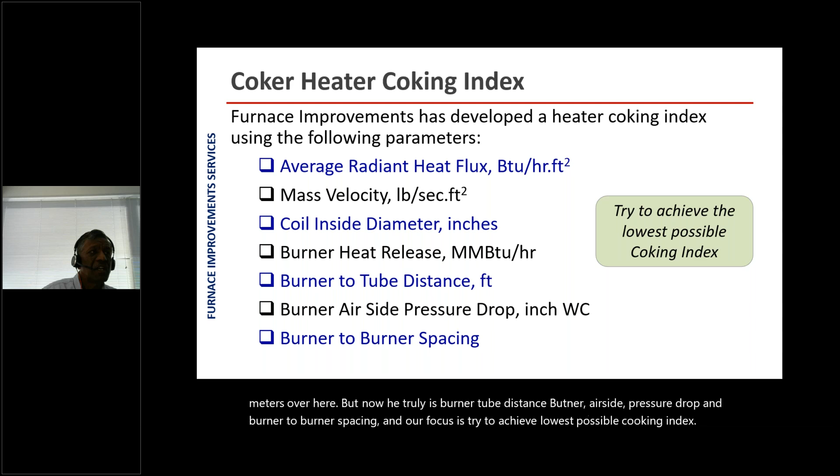I want to show you a quick comparison of 2 heaters, coker heater 1 and coker heater 2. This is from 2 jobs which we worked on. And if you look at it, coker heater 1 was designed for lower heat flux, higher mass velocity, but has a higher coking index. The other heater is designed for higher heat flux, lower mass velocity, but has a lower coking index. So just keep your options open. You have to make sure that you look at the complete picture, not just look at the computer output.

Look at the heater configuration, look at your burners, look at the flames, and try to make sure your heater has a low coking index. If you want any help, you can always send your coker heater details to us, and we will calculate the coking index and give it back to you. And we can also tell you where you stand with respect to all other heaters, what is the range.

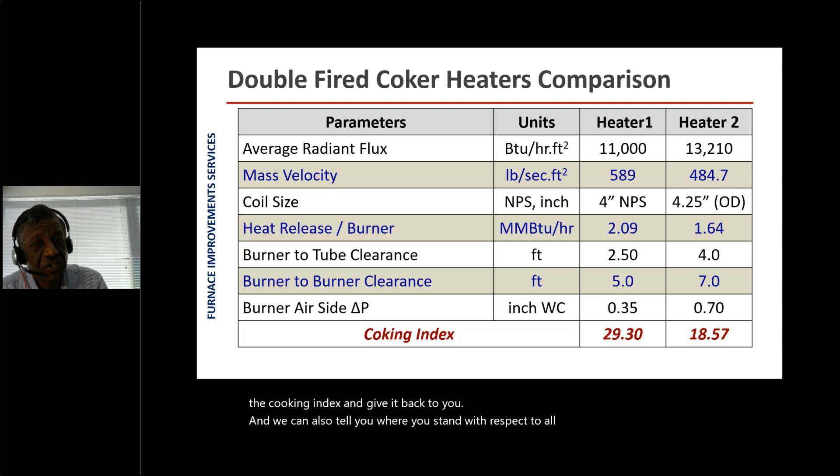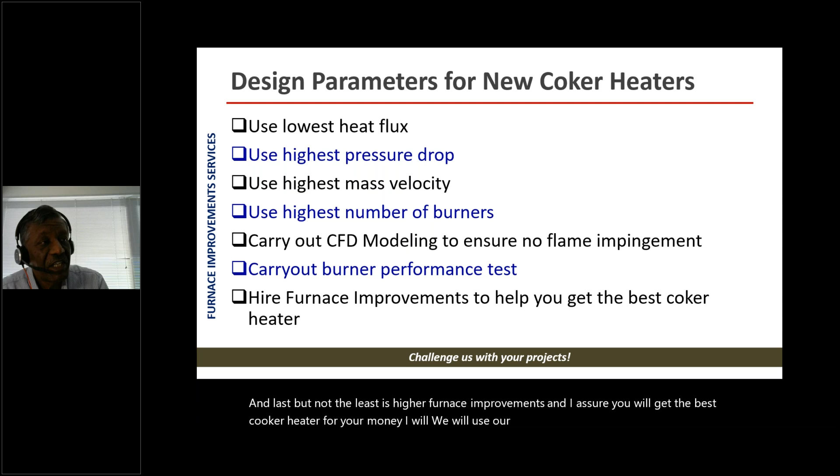If you're thinking of installing a new heater, these are some guidelines from my side. Use lowest heat flux, use highest pressure drop, highest mass velocity, highest number of burners, carry out CFD modeling, carry out burner performance test. And last but not the least is hire Furnace Improvements. And I assure you, you will get the best coker heater for your money. We will use our experience to work with the heater vendor, whomsoever you select, to get you the best coker heater that you will be happy with for the next 25 years.